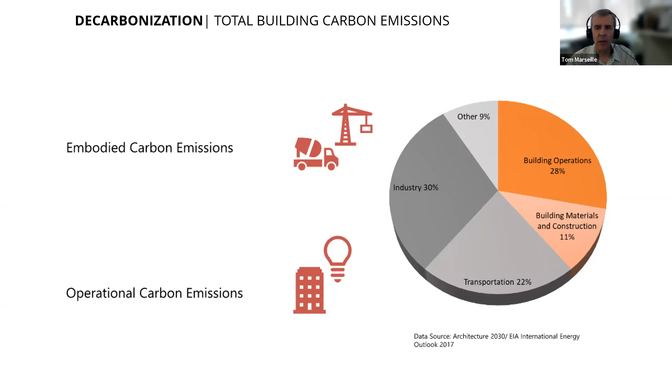Say mute. There, try that. Are we good? Yeah, there we go. Great. I'm glad we worked that out now.

My name's Alissa Feucht, and I'm a senior sustainability strategist at Glumac. So my day is focused on helping owners create sustainable buildings that work. And so a lot of LEED certifications, Living Building program, Fitwel, so healthy buildings as well. And just really happy to be here. Okay. Jack, can you go next, please?

Hey everyone, I'm Jack Rusk, climate strategist at EHDD Architecture, offices in San Francisco and Seattle. I build data models to help understand kind of whole carbon emissions from buildings, operational, embodied, landscape, et cetera. I'm excited to share some of the results from those today. Okay. My friend Salone, can you please go next?

Hi, everyone. I'm Salone. I'm Vice President of Development over at Urban Visions in Seattle. We are a privately held development company led by Greg Smith. We develop, hold, and operate our buildings. And because of that, we have overseen several buildings through inception, occupancy, and post-occupancy. We've experienced firsthand the pros and cons of our decisions.

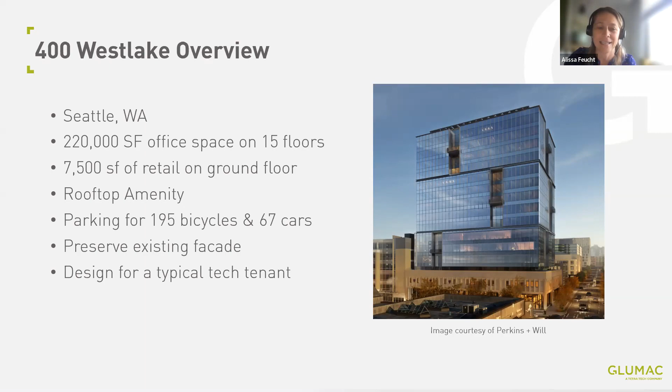Also, we're not allowed to use any fossil fuel for space or water heating, and use only non-potable water for non-potable uses. So we'll be collecting all rainwater and gray water on site in order to meet both our flushing demands and our irrigation demands. And the building also has to achieve Petal certification under the Living Building Challenge. There are great incentives for owners pursuing this work. They get up to 25% increased area, FAR, and they also get additional floor height, typically like 1 to 2 additional floor levels.

So what is the Living Building Challenge? Living Building Challenge Petal certification requires us to achieve 3 of the 7 petals under the Living Building Challenge. One of those 3 petals has to be either materials, water, or energy, all of which are pretty difficult petals to achieve. Materials petal requires basically all Red List free materials being installed within the building, as well as an offset of the total embodied carbon of the building, a one-time offset. Water requires you to be net positive water, and energy requires you to be net positive energy.

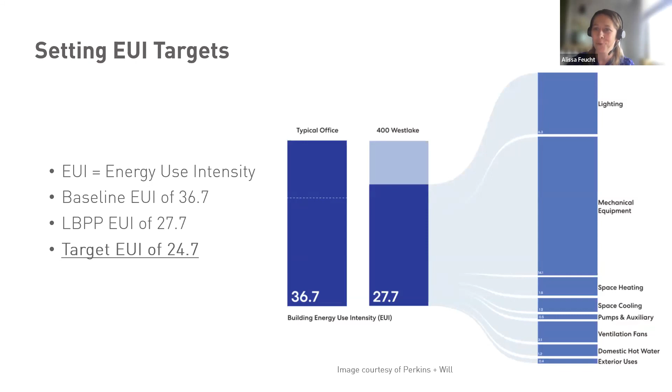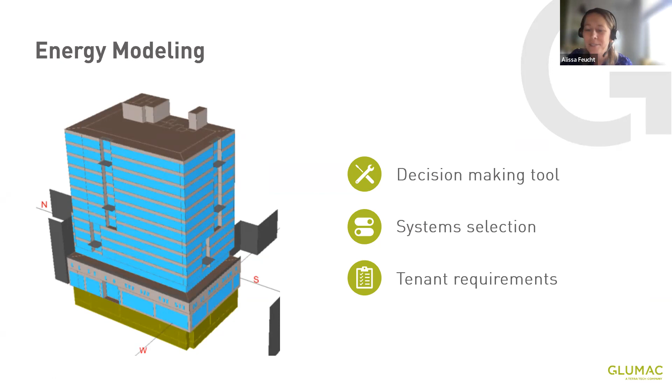So in order to make sure that we were designing the building correctly, we used energy modeling. So we use this as a decision-making tool. It helped us determine our envelope parameters. It helped us make our system selections. And then it helped us also establish requirements that we were going to place on the tenants moving into the building. So we wanted to make sure that we were setting the building up with great infrastructure and great systems. And so when the tenants moved into the spaces, they weren't going to have to take basically the brunt of the work to get to our goal of net zero energy and the other stringent goals of the pilot program. And so this helped us establish some requirements for the tenants.

So we did have to make some assumptions with our model. Again, we were designing for the typical tech tenant. So we had a pretty dense occupancy of 130 square foot per person, typical occupancy schedule of 8 a.m. to 6 p.m. And then some of the things that we wanted to put on our tenants that we didn't think were too stringent included a 10% reduction of their lighting power densities from code. Also, equipment power densities could be no greater than 2 watts per square foot. We can't be putting too much heavy equipment into these spaces to make sure we are going to be able to offset all of it.

Also, some pretty stringent plug load controls to make sure that equipment was turning off when it wasn't being used. And then we do not want the tenants to be straying too far from those space temperature set points that we set, and also wanted to ensure they were installing low flow water fixtures so we could meet that stringent water goal.

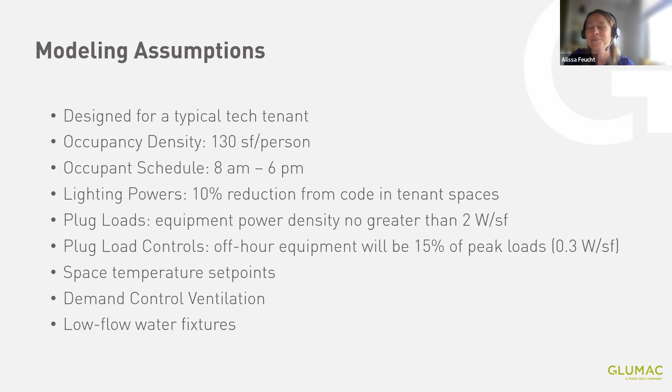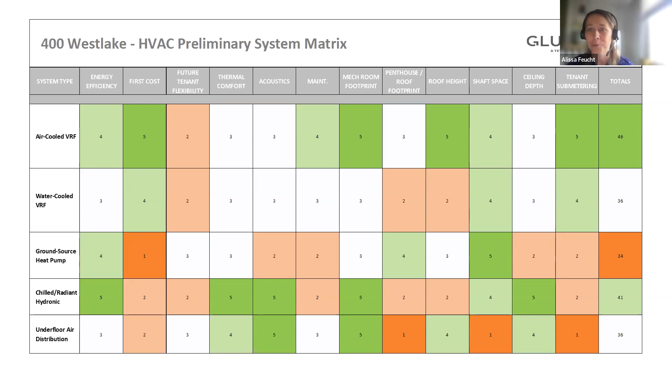So we started with a simple HVAC matrix to help us select which systems we should even plug into our energy model. And so we analyzed 5 different system types here and looked at different parameters to see what kind of played out the best for this. If you look at this, the air-cooled VRF system actually scored the highest in this, and that's because its first cost is typically the cheapest out of any of the systems that we looked at, and it also is pretty energy efficient. Coming in second here is the chilled radiant hydronic loop, also known as active beams.

So using this first analysis, we narrowed down our selection. So we narrowed it down to both the air-cooled and water-cooled VRF systems, as well as active beams. And these were the three systems that we decided to put into our energy model. So as you can see from this analysis, the active beams was the most energy efficient system, which we already kind of knew, but we were able to see how much more energy efficient.

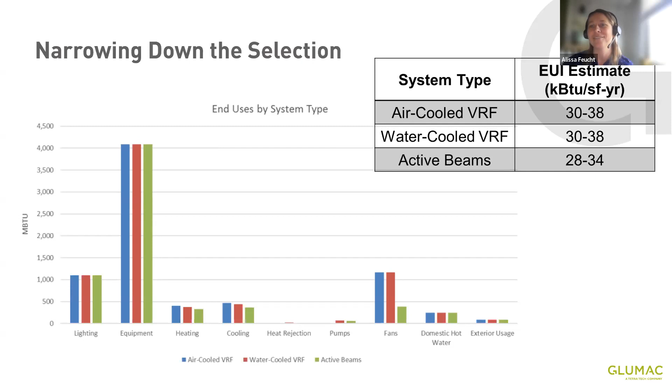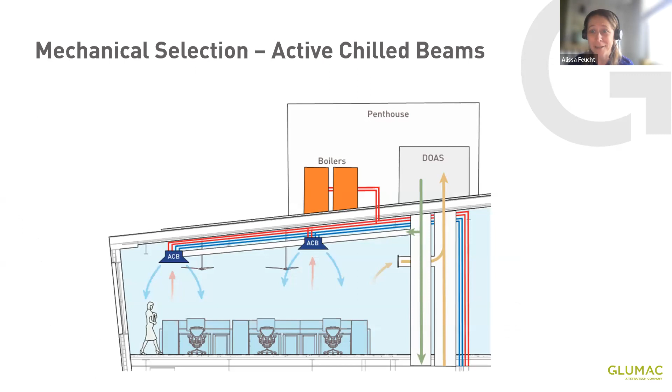And because the owners really wanted to design the most efficient infrastructure that the tenants could move into, this was the system that was selected in the end. And so it was an active beam system connected to a heat recovery unit that was supplying all the ventilation with a really good heat recovery effectiveness at 75%. And then also some equipment on the rooftop that was supplying those active chilled beams.

So we've designed the efficient envelope. We designed some tenant parameters to help us get there and selected the most efficient equipment that we could into the building. How do we go and get to that total net positive energy? Because we're located in a downtown dense urban environment, there's only so much PV that we could install on our building. And so we maximized the amount that we installed on our building. We were actually required by the offsite exception to install it for 75% of the available roof area. And so much of the roof is covered in PV to help us offset as much energy as possible on site.

Then we look to the offsite exception and will be installing over like 6 rooftops worth of our building located within the same regional grid in Northern Oregon. And so with the combination of all of that offsite energy and our really efficient systems and some of those passive strategies and tenant strategies, we should be able to get to that 105% offset of total energy use.

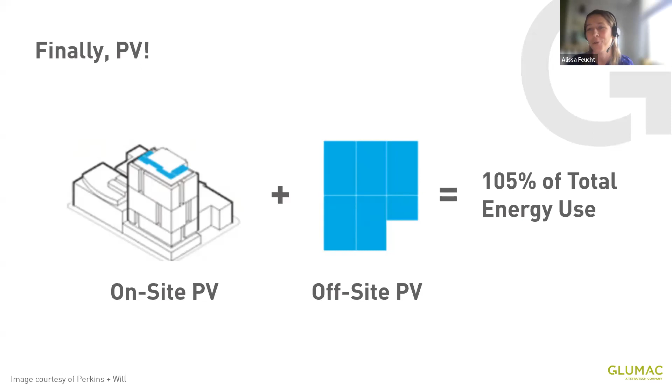So for this project, we really wanted to make sure the most important thing was designing for those future tenants. And so the tenants will be able to easily tie into that efficient base building infrastructure, utilize the chilled beams for heating and cooling. Also, they will have some requirements about the energy and the water to make sure that we are meeting those requirements.

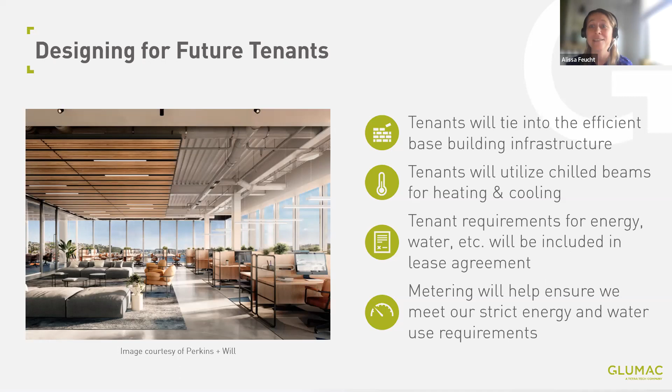And then the metering is a very important part of this project. In that post-occupancy year, we just want to make sure we're checking in on the building routinely and everything is working as needed. And if there are any spikes in energy use, we can kind of go on in, fix it really quick to make sure we're going to meet those goals at the end of that year.

So I just wanted to say thanks for being here. And I wanted to thank Perkins & Will, the great architects on this project, MSRE, the owner, and then also Lease Crutcher Lewis, who's doing a great job on the building right now. The building should be in substantial completion in February of next year. So we're really excited to see it built and operating.

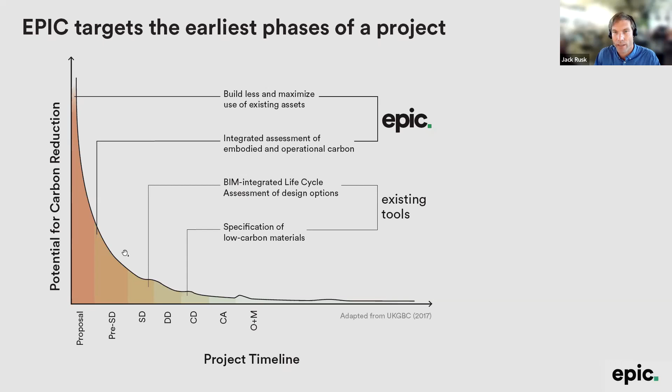Like Tom mentioned, we don't just look at operational carbon. Especially in places like Washington, where the grid is very clean, you see operational carbon taking up a smaller proportion of overall building emissions and embodied emissions taking a relatively larger portion. So EPIC looks across embodied carbon reductions, things like building less, changing your structural system, specifying lower carbon materials, reducing office churn to preserve interior fittings in place; operational measures, building electrification, lowering your energy use intensity, solar PV on site; and looking beyond the building at site and landscaping measures to either store carbon in living systems or to reduce hardscape area. So again, this model is built so you can adjust and plan scenarios to look at both changes in operational and embodied carbon over time.

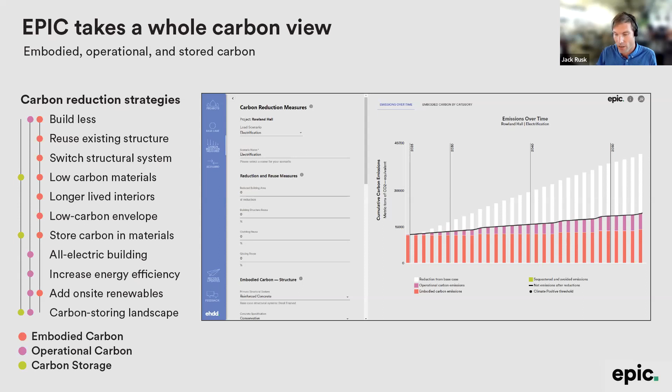The model is used by about 700 people at this point across a little over 400 firms, part of standard scope of work in a lot of places. And it's been really exciting to see the uptake. A lot of work went into it. And I'm sure sometimes when I reach this part in the presentation, people wonder what it all costs. We've made a significant investment in EPIC over the last couple of years and are committed to offering it freely to close this gap in the design lifecycle. We've been really lucky to get good peer review and support from people at structural engineering firms, mechanical engineering firms, and academic advocacy organizations like the Carbon Leadership Forum that have allowed us to move what was originally an internal tool out into the world, free to use for people interested in asking these questions about their buildings. So now to talk some about the data model itself and what it tells us.

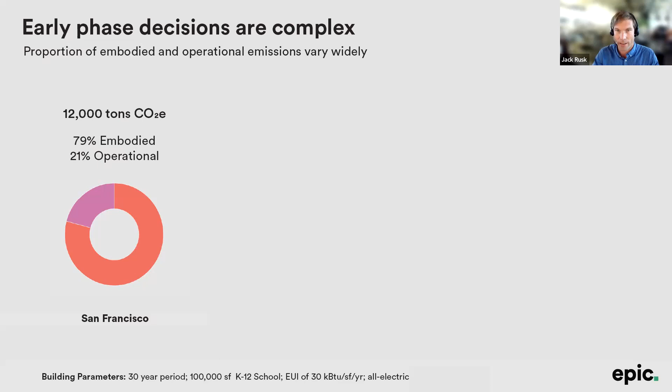One thing that is really clear is that early phase decisions and generally the embodied and operational carbon trade-off is really complicated, or can be, and data models are a way to help untangle some of this complexity. So I'm sitting here in San Francisco and I modeled a basic building in EPIC, and we see about 80% of the emissions are embodied and only 20% operational over the next 30 years, because of how clean the grid is versus the materials involved. This has a lot to do with being in San Francisco, because when I use the same parameters in other locations, Seattle, Albuquerque, and Salt Lake City, we see really big differences, both in the proportions of embodied and operational emissions over a 30-year period and in the absolute magnitude of emissions.

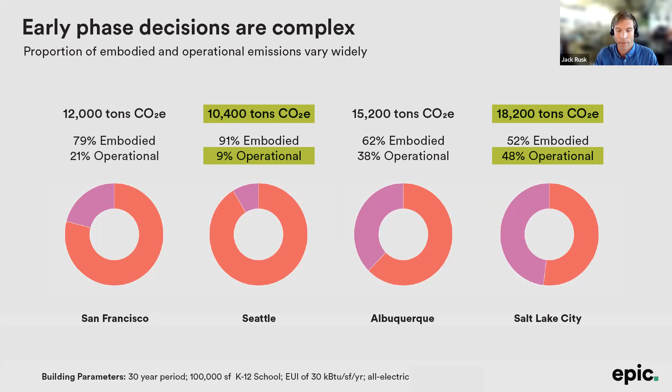Some things stand out. In Seattle, where the grid is really clean relative to a lot of other places in the country, we see a lower absolute magnitude of emissions. The same building over 30 years, only about 10,000 tons, versus a place like Salt Lake City, where it's almost 20,000 tons, and operational emissions are almost half of building emissions over 30 years. So this is a way that regional variation affects the trade-offs between operational and embodied carbon. Even more so when we look beyond just that trade-off and into how we're going to start working towards net zero buildings.

This focuses on operational emissions and the same set of comparisons. On the left side, you see if I were to plan the same building as a net zero building in San Francisco, I could specify a PV array of about 470 kilowatts, modeled in NREL's System Advisor tools and stuff like this to figure out the size of that.

And then applying that to all these other scenarios I set up, we see that the same PV system in Seattle actually can't cancel out all of the emissions because there's a difference in solar irradiation patterns, right? The solar resource is different in Seattle. But in Albuquerque, even though absolute emissions are much higher, the same solar array can actually bring the building to net positive because of the same trade-off between the amount of solar resource available and the operational emissions.

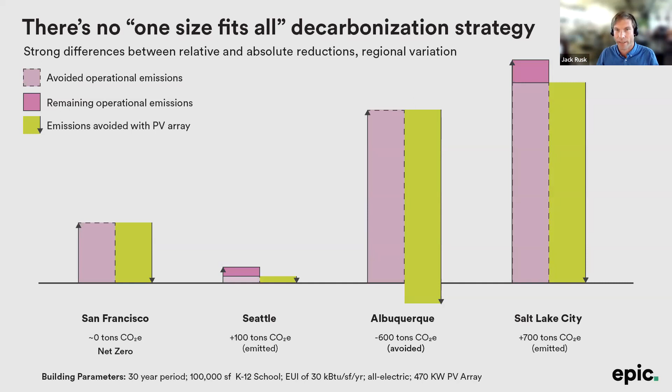I think for a lot of firms and organizations that do work in more than one geography, it's really important to understand that there's no one-size-fits-all solution. So what I'm used to here in San Francisco, or people are used to in Seattle or Albuquerque, isn't applicable in other grids and other climates, et cetera. So that sets out some of the basic distinctions between places.

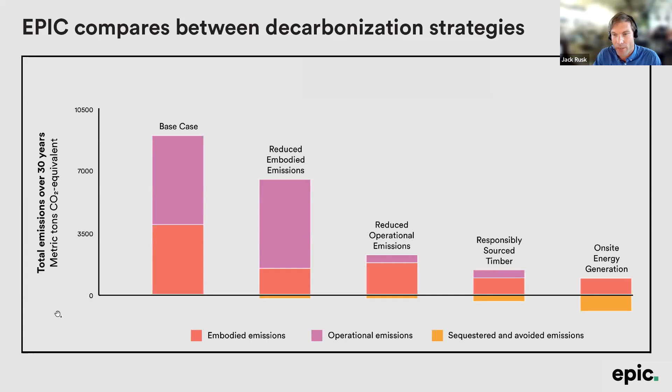EPIC also looks within a building to try to identify what pathway to decarbonization might exist. These are results from EPIC looking across 5 different scenarios across 30 years for the same building, trying to understand how different measures stack up to illustrate a pathway to decarbonization.

EPIC 2 is only one tool. There's a lot of other tools out there, and the ecosystem of tools is trying to do a better and better job of working together, connecting tools like Tally and EC3, tools like Pathfinder that work in the landscape, Architecture 2030's upcoming CARE tool that looks specifically at retrofits, all working together across the project lifecycle to plan carbon reductions.

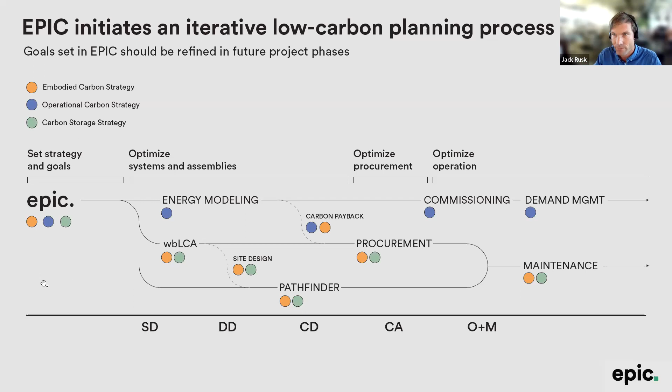Okay, now I'm going to talk really briefly through a couple case studies to understand how this stuff actually comes through in a project. This is a recent EHDD project, or rather an ongoing one, the retrofit and renovation of the AIA National Headquarters. We plan for a large embodied carbon savings by reusing the existing building. It's going to be an all-electric building with on-site energy generation and off-site energy generation that's based in a community project that provides emissions offsets to the building.

We used EPIC before we even had a basis of design for the project to set out some options for what these could look like. Again, trying to plan ahead into the future and using data models to make sense of some of that complexity. So here's 3 scenarios we set up that we presented to the client before we had a building model, when we were still in the very early planning phases, to choose the best set of strategies to deliver a net zero headquarters.

On the building operation side, I think there's a lot of emphasis on energy, and rightfully so. Here we're seeing this other real potential, which is in our approach to interiors. If interiors, for instance, are replaced every 5 or 10 years, there's a lot of embodied carbon in those materials. One thing we're looking at here is how do we extend the life of existing interiors and interiors to be installed to lower the embodied emissions from building operation.

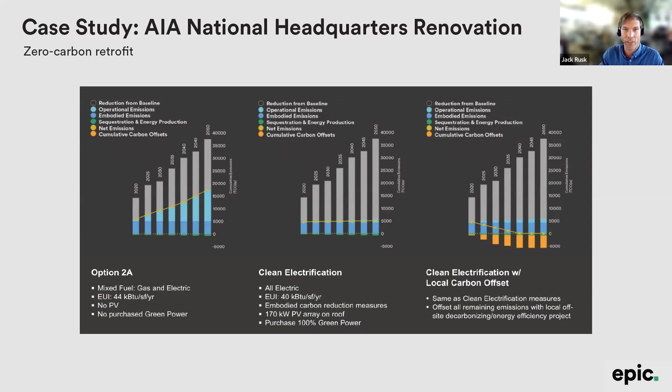The second case study, one I'm really excited about, is the Sonoma Clean Power Headquarters. This is a community choice aggregator, a clean power purchase group in Sonoma in California. Again, it's a building reuse project. One of the clearest ways, like Tom said, to reduce embodied emissions is to reuse existing buildings. Again, it's all electric. Again, energy generation. But the really exciting thing here is that there's on-site energy storage that's grid interactive.

And there's a whole process here that the engineers did to make the demand response systems that dispatch the battery respond not to a price signal on the grid, but to a carbon signal. So to refigure the firmware in the energy storage and grid interactivity components to make them responsive to the carbon profile on the grid, right? And not just the price, because sometimes those things line up, but sometimes they don't.

Again, using EPIC to model what this looks like over time, we see the way that over 30 years, this project is able to not only reduce its embodied emissions through things like low carbon materials and building reuse, but also through the combination of energy generation, energy storage and grid interactivity, reduce 100% of its operational emissions, even over time having the potential to have a net generation.

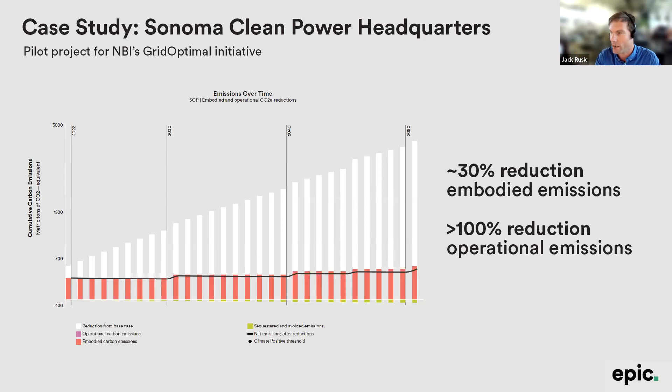And this is a way that we're able to mock up rough models of how all this stuff works together to lower the whole carbon footprint, looking at operational, embodied, and landscape carbon, all in conversation with each other on these projects. Cool. Well, that's a quick soup to nuts of this early phase decarbonization planning tool. And I'm around if there's any questions here or later.

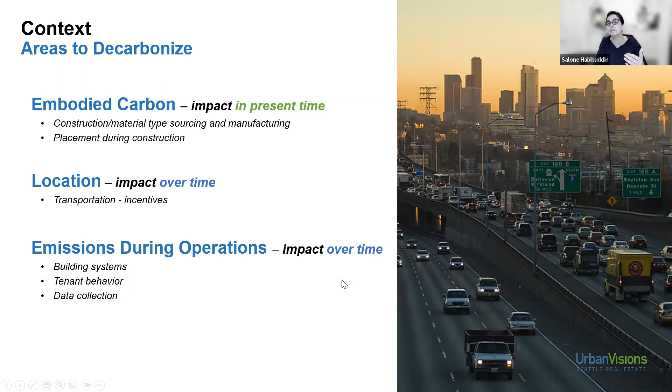So the way we broke things down, we said you can decarbonize in present time. A lot of what Jack mentioned is about embodied carbon, and it is very critical. And we also looked at how you do this over time. A lot of what I'm going to share is about the future and emissions during operations, but the impact over time. So let's talk about the why for a second.

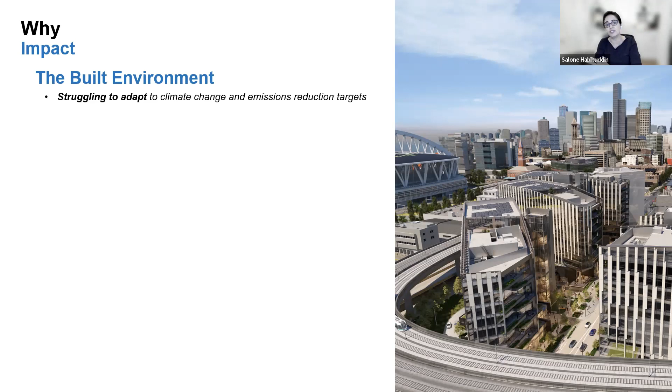Coming back to impact, we felt that in the built environment, there's millions of square feet where even we as developers have put buildings out there that become stagnant day one. And it's really hard for them to then adapt to the future technology or innovation that comes to reduce carbon. So with Moore's law, we don't know what technology is around the corner, and these buildings that even we put out are not built to adapt to the future.

So we as a company took on a philosophy. It's a little bit of an audacious challenge, but this was our version of trying. Our challenge is that Urban Visions will not develop a building that becomes stagnant or obsolete at TCO or day one. That's our endeavor going forward. And what we're trying to do is bridge the gap between what gets built and what's coming around the corner.

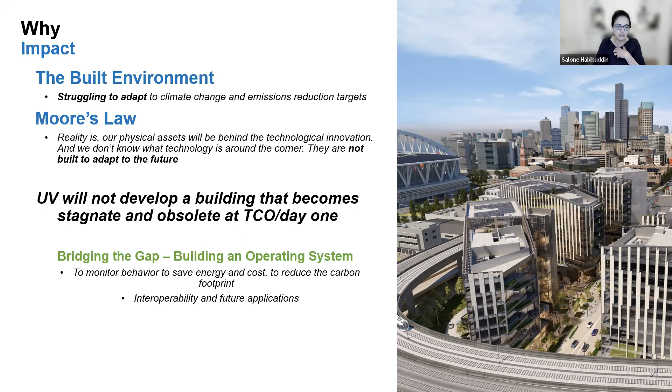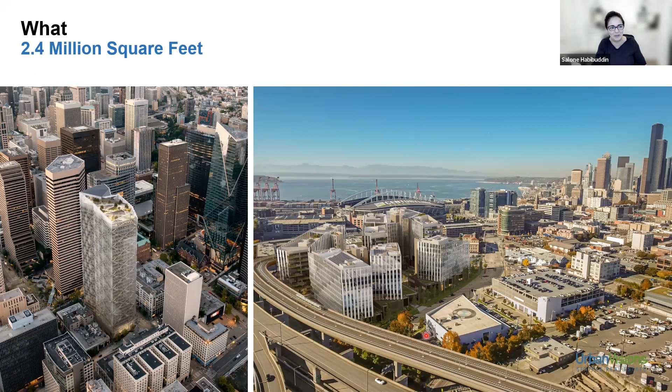And we're trying to build our buildings as operating systems. So that's something that we're focusing on. And we're doing this to do two things. We're looking at monitoring behavior to save energy and cost and to reduce our carbon footprint, but we're also looking at interoperability and future applications. So let's look at what we've done to deploy it over this 2.4 million square feet that we're developing as of right now.

And I apologize, my laptop's just being a little jumpy today. Sorry about that. Here we go.

We also look at on-site renewables. One of our projects is over an acre of PV panels. We do a carbon offset, but we try to do that as a last resort. And then we really focus on biophilia as well. And then the most important thing to us, which is what I'm really going to expand on, is network architecture, the infrastructure for future proofing.

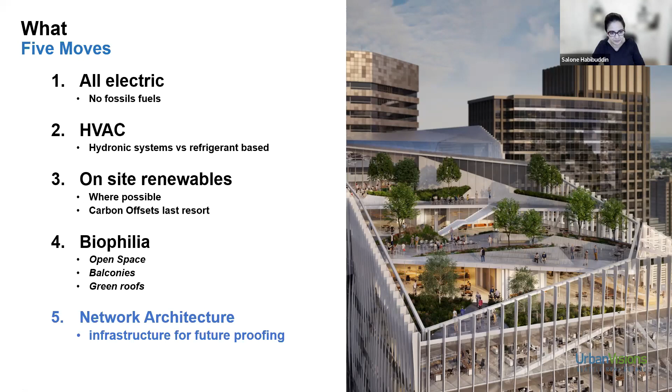So talking about network architecture and why this was important and how we broke it down, we said, let's look at our buildings in a way where we can build an efficient backbone and pathway, which typically we don't look at in buildings, and everyone does everything in a vacuum, mechanical, electrical, plumbing, and it's redundant and it's costly. The other thing we focused on was bandwidth for future and current processing power. The third was owner cloud accounts, whether we do local servers versus servers in the cloud.

And then also we definitely studied software and machine learning. And this was incredibly important to us because we wanted to make sure we got current and actionable data. And I use those words very, very deliberately. It's not about just getting data, but it's got to be data that we can act upon. And the fifth and most important is being very strategic about security.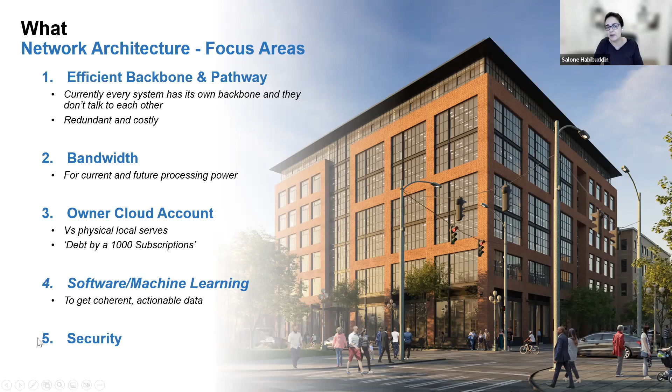So let's quickly dive into how we did this. So the hows are going to be based on three things: culture, the teams, and design. First, we've got to begin with the culture of how this happens. It really does begin with Greg. He has told us, get out there, be curious, go explore. And what that led to was us continuing to educate ourselves, continuing to innovate and incorporate. And it's about agile responsiveness. This is about making real-time decisions.

And I can tell you, I think our poor consultants may have a love-hate relationship with us because we may start off with something and we may end up with something very different. But that is something that is very critical, where it comes back to Moore's law: how do you try to bridge the gap between technological innovation and how slowly real estate adapts to innovation.

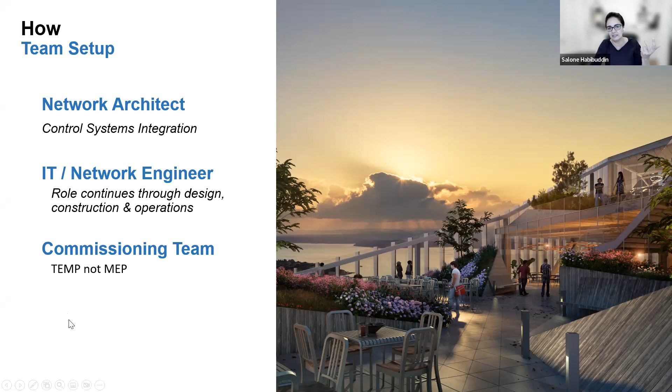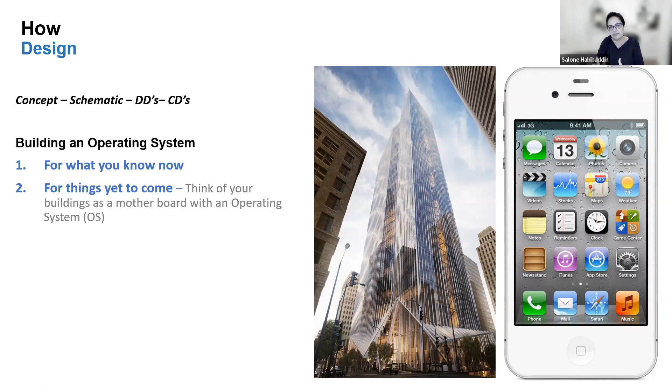We've been always taught when you design, you go through the 4 phases. But here's another way of looking at design. You're designing, look at your buildings as an operating system and an operating platform. Design for what is it that we know now, but also design for things that are yet to come. And that is something that I would ask us to do, to have a bit of a shift in the way we approach the built environment.

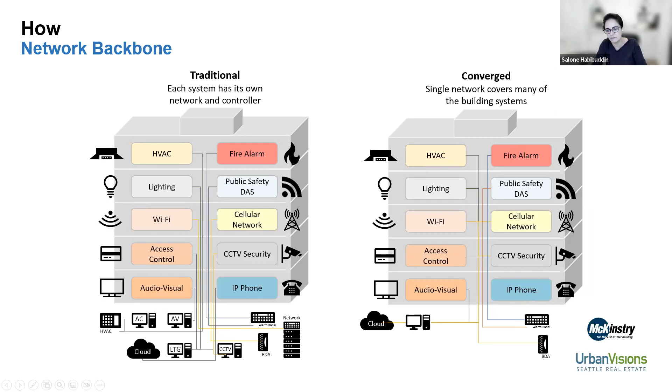So what did we really incorporate into our buildings? And these are the last 3 slides, folks. So just to let you know, what does this network architecture really look like? Typically, this is a lot of how the buildings are designed. MEP does their own work. They each have their own backbone, and the buildings are infiltrated with all kinds of equipment, head-end equipment. And a converged and a well-designed integrated network architecture looks very streamlined.

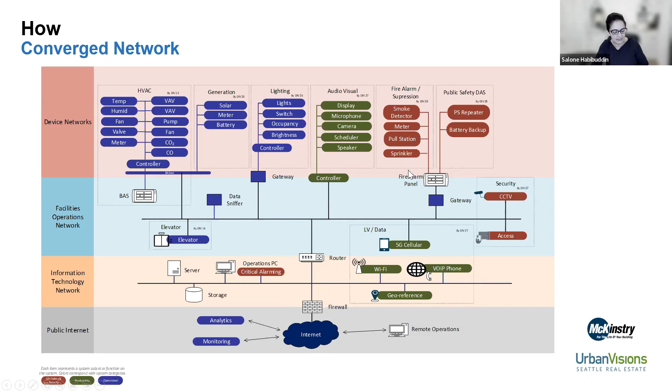The other part of this is that you also end up with a very clean basis of how you build your platform. You make sure you have firewalls, you have the different layers as you build up. So there's horizontal integration as well as vertical integration. And then the last part of this is also then how you end up with integrating with your tenants. By the way, the 3 slides that I've shown you, these are just graphical versions of what's actually been put into our CDs under the network architecture drawings. So this is something else that's also well thought out, and we use this to then put into our lease documents as well as in our shell and core matrix.

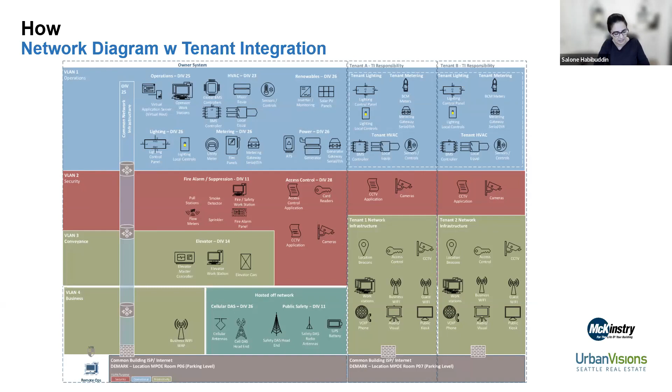The last thing I do want to just leave you with is a little bit of a philosophy. It's our behavior and our usage patterns that have brought us to where we are today. And really the power of technology is it really teaches us a lot about ourselves. And it'll continue to teach us a lot about ourselves in the future. And that's why in many ways we feel that it's super important to integrate our network architecture into our buildings so that our buildings are still relevant going forward into the future.

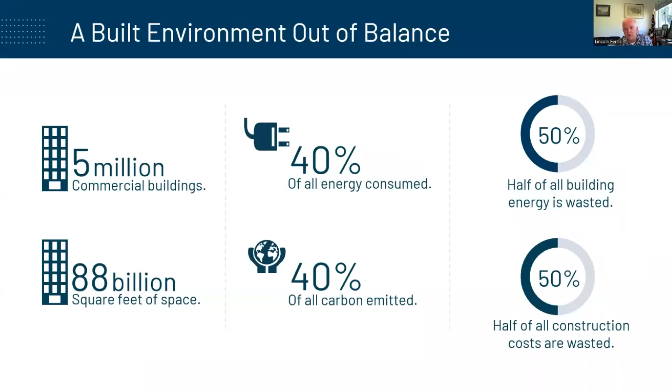Now, as such, one of the things that we took a look at is, as you all know, there are many market forces pushing us on the policy side to take a look at reducing carbon emissions. In particular, for the state of Washington, House Bill 1257 set a set of targets out in the future, which are fast approaching, but also really require us to take a look at significant reductions in greenhouse gas production from all aspects of how we operate as a campus.

And more particularly, the Seattle Building Code has become much stricter, so that if we modify a building and it's considered to be substantial alteration, it now must meet these newer codes. So we took a look at the opportunity, instead of saying, hey, this is a conundrum, because there is no easy state funding source that we can use for energy conversion projects. We looked instead to saying maybe there is an existing program which we can take a look at.

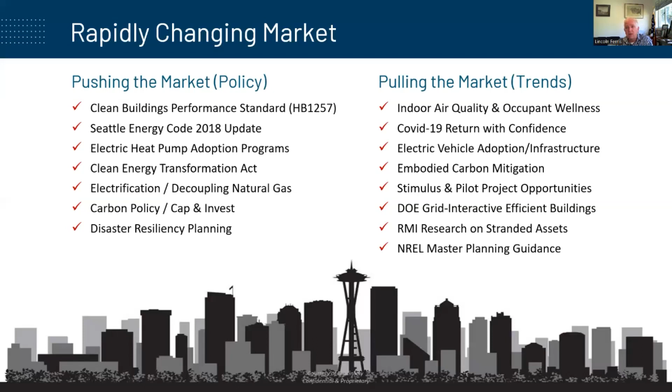And in this case, we have been working with McKinstry for many years using the Energy Savings Performance Contracting WACs to be able to finance, through energy savings and through a guaranteed maximum allowable price on the investment, a series of conversions of things like our lighting systems, our heat, air to water heat pumps, that have made us a much more efficient campus. And with that as a model, we started to take a look at, we actually know something about an eco-district.

And by that, if you're sitting in the Smart Building Center today for this conference, you're in a building that in 2015, we converted from a 100-year-old building, highly energy inefficient, to one that met the then new building standards from 2012 adopted by the Seattle Energy Code that required us to make it no less than 120% of the energy savings performance that would be expected of a brand new building. Well, what does that involve?

Well, among other things, it meant partnering with Seattle City Light on financing incentives that were based upon the actual performance of the building, and working with the tenants, in most cases for the 200,000 square feet the college occupies, that would be our students and faculty, to try and teach them about how they can reduce the actual impact in the building by the behavior that they have.

So at the core, as we started to take a look at our Broadway campus, the opportunity to engage with our neighbors, the opportunity to engage with Seattle City Light, and to take a look at a mini grid that could be expanded over time as new construction and or conversion of buildings is done around us. But more importantly, with thermal share in particular, loads can be shifted at different times of day between different uses in buildings. And by bringing in buildings that have both residential as well as office and or college use, we could create an effective load sharing that would reduce the cost for everybody who engaged with the eco-district.

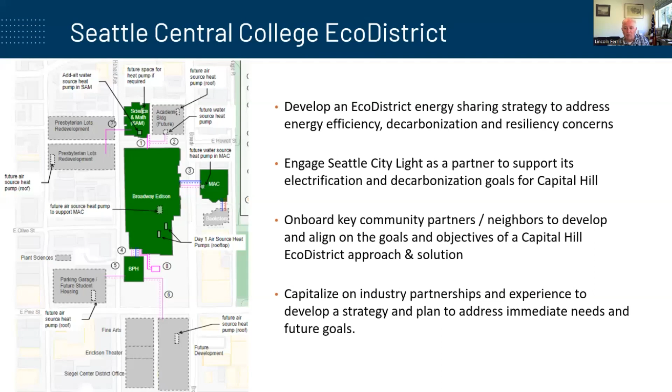Now, one of the things that we had to do, and I should say this was not an overnight decision, we have been looking for many years with Gordian's help at our deferred maintenance, and we knew that we had a huge backlog, if you will, in our primary buildings, the 400,000 square foot main Broadway Edison campus. But we also looked at the fact that these deferred maintenance costs would overwhelm any funding sources we have.

And we commissioned a life cycle, if you will, analysis of the existing equipment we had in the building with the help of McKinstry to make sure we knew what really needed to be retained and what needed to be replaced. So electrical panels that are at the core of much of this thermal sharing were at end of life, as well as the steam system.

We wanted to also get past building by building upgrades and really take a look at a comprehensive approach that would have a 30-year timeline and frankly would then be paid for through bonds that could be issued like a building bond at 25 years to spread out, if you will, the cost of amortizing this capital investment.

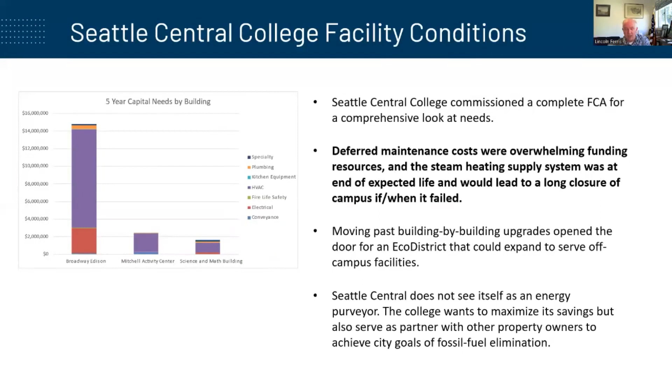We don't see ourselves as an energy purveyor, and I want to be really clear about that. We are not a new mini utility, but we do think that by engaging with our neighbors over time, we can bring down the overall cost and increase the reliability of our system for both ourselves and for adjoining property owners.

Now, the economies of scale are really something that have been demonstrated in other McKinstry projects that are done in Spokane. But here for us, where we have in the past done building by building, here's a new system, we put new pipes from the steam supply. What we really wanted was something that had economies of scale realized and in effect have one spare, if you will, behind to make sure that everything kept online for as long as possible and minimize the amount of repair services, but also acknowledge the fact that

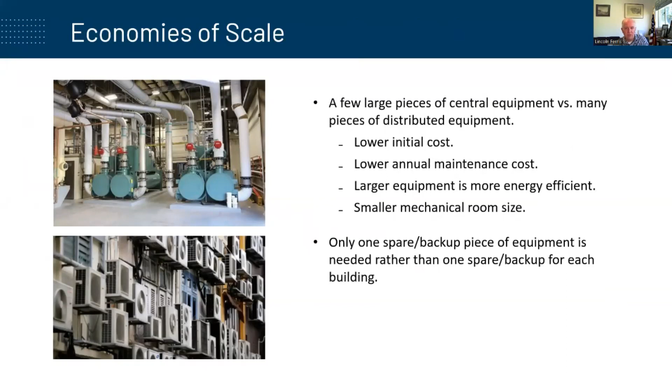we have a hard time recruiting the specialty trades that can maintain some of this system. And so we are looking at this as a long-term partnership with McKinstry as our support staff, if you will, to maintain and operate the eco-district.

The end vision is really both decarbonizing the campus, and we think again that we can realize significant savings. Up to a third of the cost of our bond servicing is going to be coming from utility savings, but also increasing the resiliency of our system and making sure that we are setting aside money again over the next 25 years to replace it. The overall goal is to reduce and achieve a 30-year average cost of $350 to $450 a square foot, and again to keep meeting or exceeding the climate change impact goals the state sets for us.

Now, this has been a multi-year partnership, and I want to say we are sort of at this point where we have considered, we've done all the information gathering, we've done the engineering studies, we've finished the economic evaluation. At this writing, as I'm off fishing in Alaska, we now have a guaranteed maximum price for this.

And really our next steps are to go to our two sets of trustees here at the local area in Seattle and then at the state to get approval to bring this, if you will, to the legislature for approval for us to borrow under the local program of the state treasurer, where our borrowing costs are about 500 basis points below what it would be for a private industry partner to borrow and construct this on our behalf.

And with that, I'd like to turn this over to Ron so that he can answer questions for you. I really welcome this opportunity. I hope you'll follow along as we implement this over the next 2 years.